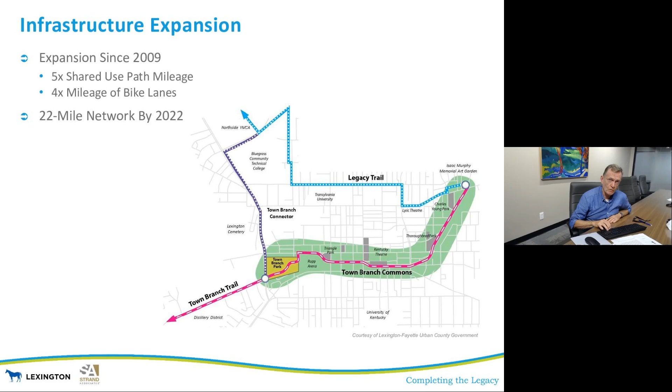What we're showing on the slide is our downtown area and how we are going to be creating a loop, a 22-mile contiguous bike system. The Legacy Trail is on the northern part of the downtown area, and it connects to the Kentucky Horse Park. This 22-mile loop with the Town Branch and Legacy Trail connectors is supposed to be finished by 2022.

Overview of the trail: we actually started the design in 2008. We had a construction completion date of September 2010, so we only had 23 months to get the project started. The impetus for the Legacy Trail was that in 2010, Lexington was going to host the World Equestrian Games.

Well, yeah, but it's not us doing it. Okay, it's the introduction music. I'm sorry to cut in, we're trying to work on it. Something happened when you switched back to the introduction and then back to your slides. We're working on it, trying to figure it out. Just let us know when it's off.

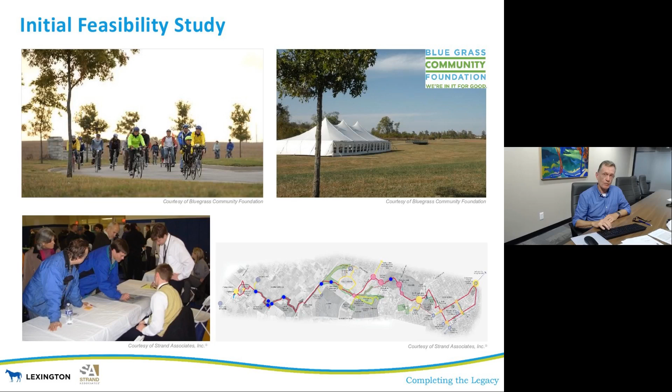The Legacy Trail has a lot of important aspects about it. It's not your typical trail. We actually had to go cross-country. There was no defined alignment, so I guess that was a good thing and a bad thing. We were not restrained on where we wanted to put it, but there was a lot of design that had to be considered.

It was through a rural area, and we wanted to take advantage of all the natural limestone in central Kentucky. We wanted to take advantage of the landscape, but also make it a signature trail. This was going to be our longest trail, and we knew it would be the impetus for getting more projects similar to this. So there was a lot of thought going into the project.

We incorporated a lot of natural features. We had Cane Run Creek that runs north-south from Lexington to Georgetown, so we wanted to take advantage of that. Plus, it was going through the University of Kentucky's Equestrian Farm, which is a research facility, and we wanted to highlight that.

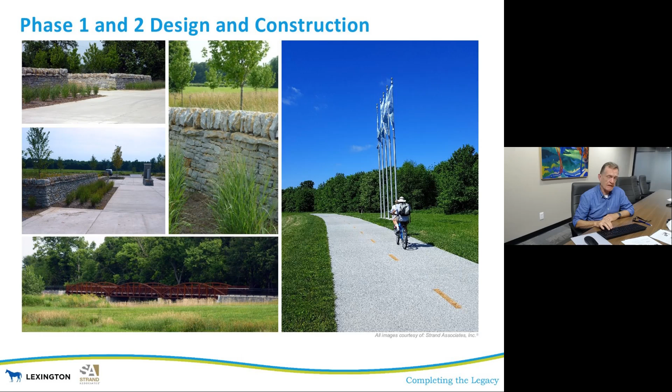So we did that in a number of ways. We included a lot of interpretive signs on the Legacy Trail, and we also included a lot of public art. All of that was funded through various agencies, and our most significant funding was through the stimulus funds, or ARRA funds, back in 2010.

Like I said, it is our longest trail and our most used trail. We average over 60,000 cyclists per year, and we estimate over 100,000 users per year total, because there are a tremendous amount of walkers who use this trail. We're very pleased with the number of people using the trail, and events happen on it pretty much every weekend or at least every other weekend. It's a heavily used project.

I'm going to talk about how we are building the third phase of the project, which is the downtown portion. That is the section of trail that goes from 5th Street at Jefferson to the Isaac Murphy project. This was the downtown portion, which is also the most difficult part of the project because it went through downtown streets with very limited right-of-way, in the urban area.

Unfortunately, we weren't able to acquire any right-of-way because we were working within existing street infrastructure. So we knew what our destination was, we just didn't know how we were going to get there.

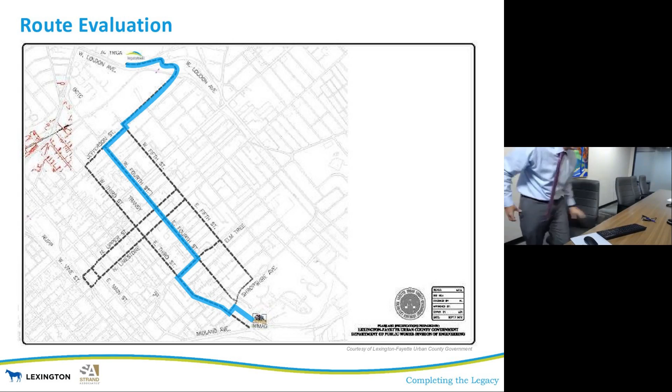Hello, so my name is Chase Wright. I'm project manager with Strand Associates, and we've been working on the project since we were selected in 2014. So it's been a little while, and we're glad to see it completed.

So the first really big decision looked at was the desired facility type. Before we were on board, the public and a stakeholder committee had continued to stay engaged between the time the first segments were complete and the time this project started. So it had tremendous public support, and they wanted it to be special.

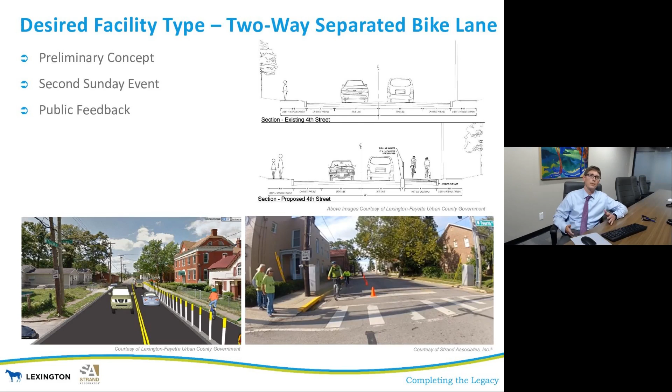Second Sunday is a biking event that happens in October. In 2014, that event actually took the route of the Legacy Trail, the selected route, and with the help of officers and volunteers, coned off a section where people could see what a separated bicycle facility would look like. Obviously it doesn't have the number of conflicts you would normally have, but people could experience it, and the public really liked it.

They really wanted it to be special. So the first step as we were looking at scoping with the city was to do a case study evaluation. There weren't many of these facilities, so we wanted to get a better feel for how they operate, and what some of the concerns and successes were with them.

People for Bikes had an inventory, and there were 210 separated bike lanes, whether 1-way or 2-way, throughout the country at this time. But only 6 were really even comparable to our project. We had Washington D.C., Indianapolis, Seattle, and Louisville, which had one planned at the time.

So what we did is contact engineers and planners from each of these cities to be part of the process. We wanted to talk with them and understand their thoughts, and how many miles they had. You can see from the graphic that it's a very low number of actual facilities they had as part of their overall plan.

The summary findings we had in March of 2015 were that the main goals were to minimize conflicts, along with a couple of project highlights. The Seattle Broadway project has streetcars running down the center of the roadway, and they had an issue with cyclists hitting those rails at acute angles, causing accidents. The purpose of putting the separated bicycle facility on one side allowed cyclists to make their turns at intersections and hit the rails more perpendicularly, so it was actually a safety benefit to utilize the facility.

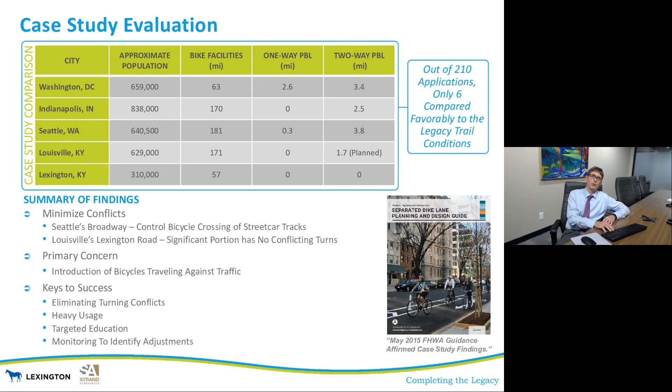So public engagement — the first segments of the project had significant public engagement. Some of the meetings had over 300 attendees, and this portion of the project was no different. We had two large public meetings with over 100 attendees, a number of one-on-one meetings with directly impacted property owners over a 3-day period, and a very involved stakeholder committee.

This public engagement was really important as we went through neighborhoods to understand the real impact of the project. The project takes on-street parking, which is very significant in the downtown area where there are often no driveways. So we needed to really understand their concerns as well as the benefits of the project.

So how do we develop special design features? A lot of people had their hearts set on basically a dedicated facility that was off-road.

And so we looked at using a green bike lane. This will be, next week, when the green gets completely put down. This will be the longest stretch of green bike lane in the state, over a mile of solid green bike lanes.

We looked at special intersection treatments. The main corridor itself is very constrained, but there's public property at some of the intersections where we can do pocket parks, and there's some wide right of way in a couple instances on Elm Tree where we can look at doing bump outs to actually fit in some seating. That was an important consideration.

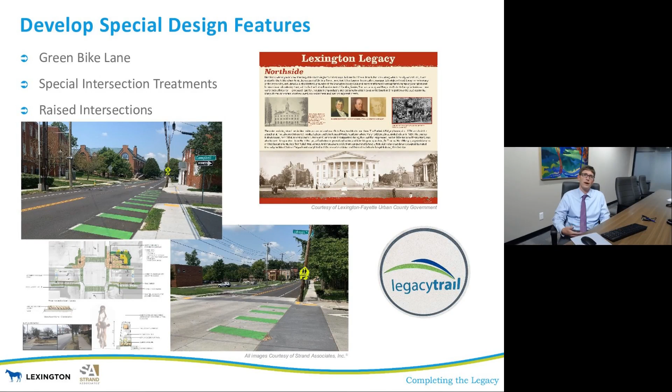Carrying on the theme of using interpretive signs, raised intersections. We utilized the Legacy Trail medallion in the pavement to help brand the corridor as we went through.

So for the green bike lanes, first and foremost, you need approval. They aren't currently in the MUTCD, but there is interim approval. There's only 3 communities in the state that have the ability to put green on right now, and that's Lexington, Louisville, and now the city of Frankfort. If you would like to use green, you have to follow a process and basically request the ability to do it. More than likely it'll be in the next edition of the MUTCD, but it's still something that needs to be done.

Next is cost. You're looking at painting solid 12 feet across the width, so it's a significant investment. With that, you want it to be very durable. With some of these pavement types, friction becomes an issue.

So the first thing we looked at is what kind of guidance is out there. Oklahoma DOT had done a study on different applications, so we first utilized that. The bottom image of the brochure is Norman, Oklahoma, a college town, that has colorized pavement demarcation. This is really the first application of colorized pavement demarcation in the state of Kentucky.

So we wanted to learn more about it. The next picture is a city in Washington State. We contacted the engineer with the city to learn more about the green bike lanes. At the time I spoke with her, she indicated they've been in the ground 8 or 9 years. I asked her what complaints they had. The only complaint she cited was that road cyclists noted there's enough friction and traction there that it actually slows down some cyclists.

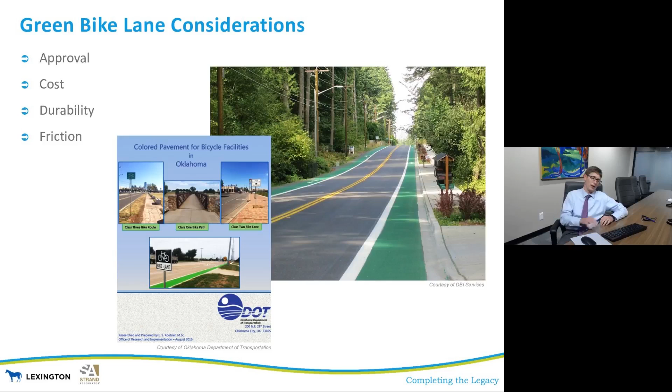So that's really the only complaint they've heard. It actually has a higher coefficient of friction than standard pavement, so it kind of checks that box. After this, the next step was we'd like to see some test applications in Lexington. So we arranged a series of test applications. On the left side is the application being put down.

So what is colorized pavement demarcation actually? It's basically very similar to high friction surfacing that the cabinet uses now along curves, just with a different aggregate. The epoxy goes down, and then they take recycled colored glass beads, they're green, and basically embed them in the epoxy. The nice thing is when the top wears off, the bottom is embedded and protected, so the color still shows through. That's what the engineer from Washington State indicated, that after 9 years it still had its color.

So the graphic is just to give you a little perspective. This is on Limestone Street. If you aren't familiar with Lexington, it's the main road that connects, a major arterial connecting the University of Kentucky campus with downtown Lexington, right at Vine Street. There's a pretty significant downgrade with a heavy right turn volume, and with that heavy right turn volume, it's buses, because the transit center is just to the right. The city wanted to implement a bike box in this location to help reduce the right hook potential for cyclists.

The picture, this was done just over 3 years ago, three years and a month, and the picture on the right was taken this week. Now it is very discolored. We were hoping we would have a pressure wash, because basically if you pressure wash, it'll remove the grit and the color will start shining back through.

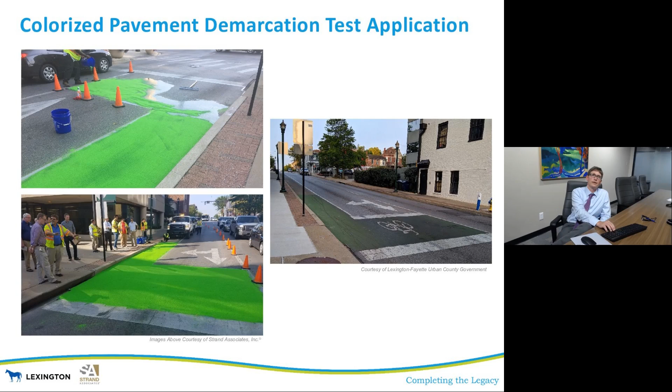Raised intersection guidance - again, there wasn't a lot of national guidance at the time, so we looked at what other DOTs are doing. Delaware and South Carolina had guidance that was very similar on raised crossings, so we took that guidance and met. Keith and I met with emergency services. They were initially a little apprehensive about the thought of a raised intersection for the project, but after reviewing the information with them and having those face-to-face meetings, they felt comfortable moving forward.

The details on the right are project details. The top shows we utilized speed transition markings going up to the raised intersection. The raised intersections are a different paving material - we used concrete instead of the asphalt road, and then used colored pavement for the crosswalk markings.

Now when you use colored pavement, this is a time to go back to the MUTCD. The MUTCD, or FHWA, issues interpretations, and there's a lot of discussion on art in crosswalks, colored pavement, that they have guidance on. If you're going to use some type of colored pavement, I recommend looking at that guidance. It gives you an idea of using colors that mimic brick patterns or earth tones - more standard approaches. There's a lot of guidance in there, but you still need the standardized markings that would mark a crosswalk, and ours have it.

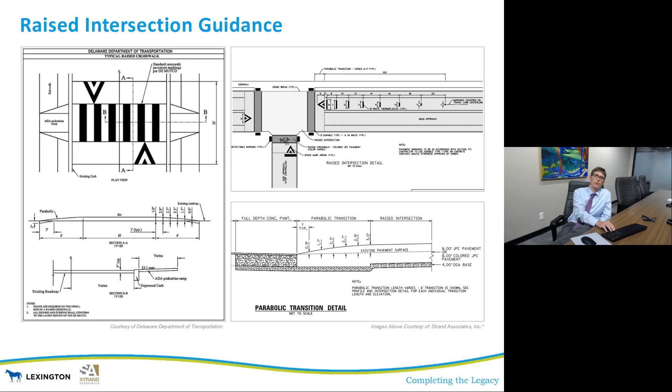The raised intersections have a parabolic transition to them, again to help slow down vehicles approaching the raised intersections. So we utilized two raised intersections.

The project corridor has two schools on it. We have Transylvania University, and the top pictures show the existing Transylvania University at Bourbon Avenue and 4th Street, as well as the final construction. Transy recently continued to build dorms on one side and built parking facilities down Bourbon Avenue, so a number of students were going to be utilizing this facility every day. We wanted to improve the crossing for pedestrian safety, and also provide some traffic calming along the corridor, as well as general aesthetic improvement.

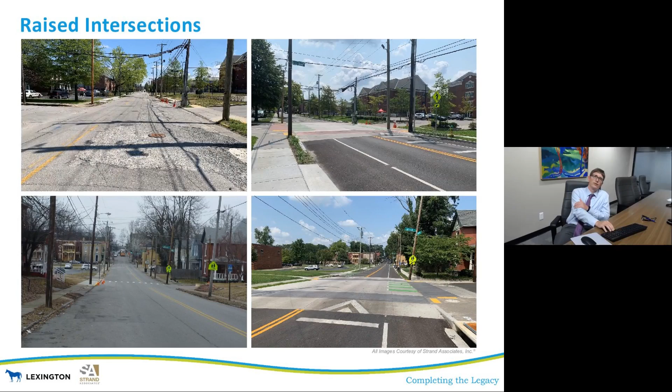One concern was that the public in this neighborhood felt they hadn't gotten the same level of attention and investment as other areas of town. During public engagement, residents expressed they wanted that same level of investment. The first phases cost about $1 million a mile, and this section is looking at about double that investment, because it was important to the community that this corridor felt special.

Some of the enhanced intersections - top left, this is on Elm Tree and 4th, where we were able to reduce the crossing distance and use that space for seat walls and enhanced landscaping along the corridor.

Bottom left is an area where we acquired a little right-of-way right at the intersection from Transylvania University. We have a seat wall, a gateway monument, and the only mile marker through this segment, along with bike racks matching the configuration in the rural segment, and flagpoles.

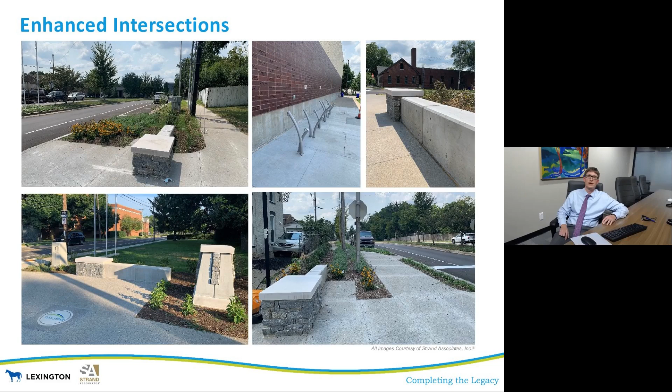Another thing we heard early in the planning is that the community likes to gather in this portion of the neighborhood. Community is very important, so providing spaces for people to have conversations would be very welcome, and we wanted to do something the community would really benefit from.

As I mentioned, the biggest hurdle from a concern standpoint was how do you take existing on-street parking and convert it into bike lanes. We knew this was going to be a challenge and that there would be pushback on the project.

One of the early steps was working with the city to identify a parking inventory, conducted multiple times on weekdays - early morning before 6 o'clock, midday, and evening - and also on weekends, so we could see how parking demand changed over time on a block-by-block basis.

Keith and I took this information and sat down in one-on-one meetings over a 3-day period. These meetings were helpful, letting people express concerns directly rather than in a group setting, which allowed people uncomfortable speaking in a large group to voice concerns, and also kept things controlled if people got upset, so we could listen and think about design solutions to mitigate those concerns.

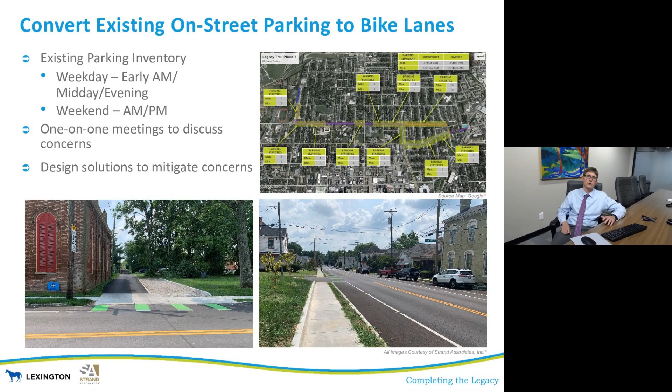The city made additional financial investment into the project to accommodate this, but it was a big success for those residents.

So, limestone curb - this is a National Register Historic District. In fact, one of the deeds we had to trace back was actually signed by Henry Clay. So to give you a perspective, this area is rich in history, and they have limestone curbs along the corridor, and that's a contributing element to the National Register Historic District, as well as the grass strip, the utility strip, which is also a contributing element.

So Keith and I, along with the state's environmental staff and the City of Lexington's Historic Preservation Officer, worked really hard to take a look at the limestone curbs and identify curb to leave in place, and curb to relocate. And when you relocate it, the problem is that over the years, the limestone curb has been chipped, hit by snow plows or various other cars, so it's been damaged.

So one of the techniques we looked at - after we figured out where we were going to put it, the next step was how do you build it? I was actually on vacation in Charleston, and I saw they had really beautiful stone curbs. So I called the director, one of the folks in Public Works, and they let me know that their key to success was not having snow plows. We obviously won't have that benefit in our location, but it's important to gather advice from other people who have dealt with this.

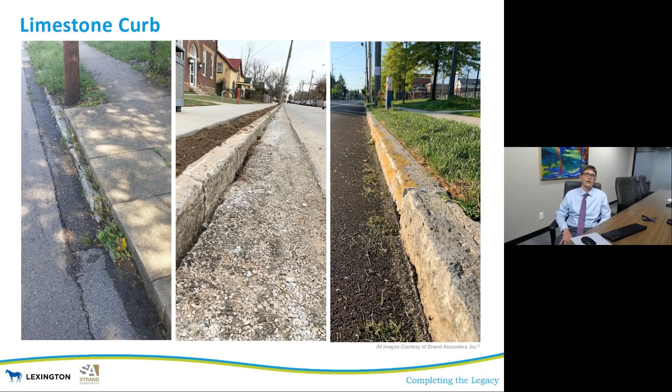This was a very significant cost on the project - over $200 a linear foot. But at the same time, it was very important and required as part of the environmental commitment with the federal funds used on the job.

So as we think about limestone, the Legacy Trail is one of the elements of the project. The picture on the left is the Gateway Monument at the Kentucky Horse Park, and the picture on the right is a gateway monument on the project corridor. Limestone is used differently in different parts, but it's obviously important for all of central Kentucky. The way limestone is used downtown is for curbs and building foundations - it's not used as much on rock walls.

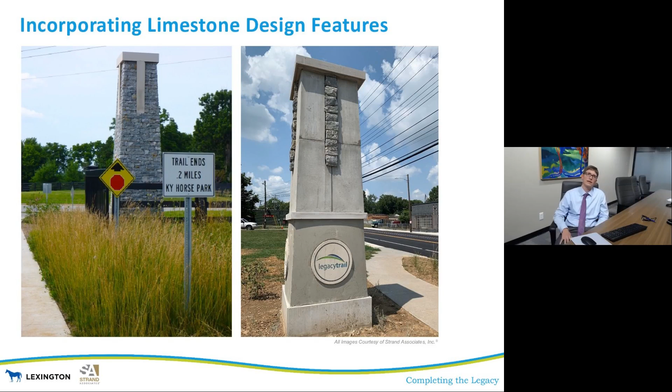So one of the things in working with the historic officer was to use more modern materials and less limestone. That was a design modification on the large gateway monuments, and also the scale of those monuments shrunk a little bit to help better fit within the corridor. This monument sits as the gateway into the Legacy Trail on the 3rd Street corridor.

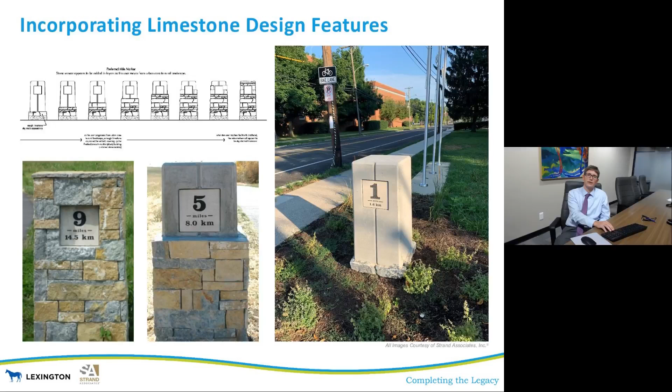This is similar to the approach we were already taking. The top left is from the feasibility study, showing how the mile markers would have less and less stone and more concrete as you got into town. Now we only have one mile marker within our segment, and you can see it's mainly concrete, versus the prior two monuments shown on the left - they're also a little smaller scale. That was another thing - being in tune with the scale of the environment, shrinking them just slightly.

So this picture on the left is a monument and seat wall that's pretty much all stone, out towards the Kentucky Horse Park. The picture on the right is a transition showing the seat wall with a significant portion of it being concrete - the gateway monument, the mile markers. So again, just showing the difference in materials, and there's one of the embedded Legacy Trail medallions along the corridor. The intersections also had enhanced concrete paving done that really helped enhance them as well.

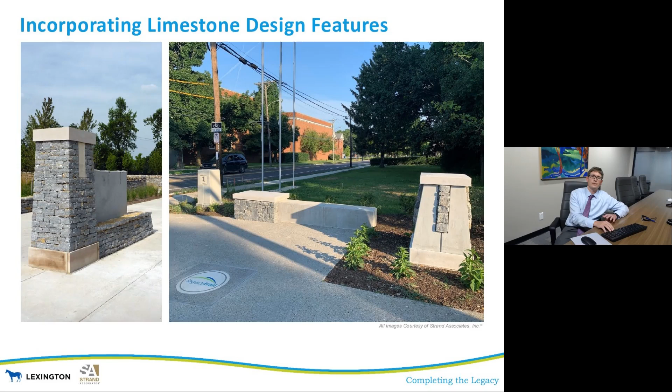Intersection improvements - here's a before and after. This is the historic Lyric Theater at 3rd and Elm Tree. They did an improvement project there several years ago that included paving right in front of their front door. In this pre-COVID world, they were very concerned about maintaining access into the front doors for big events, so we took that into consideration as part of the design philosophy.

Also, if you were walking from downtown, there was an existing 10% cross slope, so that whole area wasn't ADA accessible. What we did is bump the road in, take a paving line, saw cut out, and provide the accessible route on the new construction while minimizing impact to this historic theater, which also helped their operations during construction.

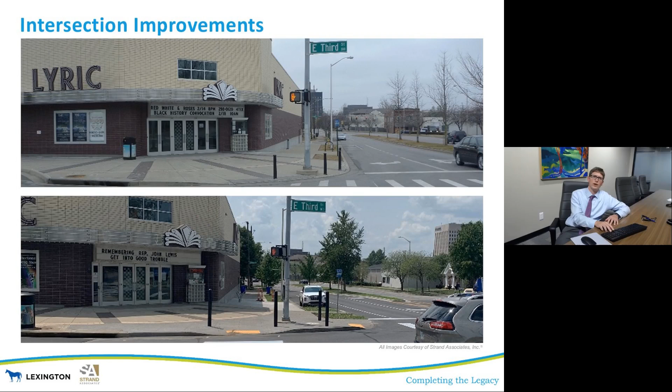Another improvement at the intersection: 3rd and 4th Streets used to be one-way in the 90s before being converted to two-way traffic. When they did that, northbound had an existing wide median and a shared through-left, with a pretty significant offset from southbound traffic. There was an accident history there, and traffic engineering really wanted to remedy that.

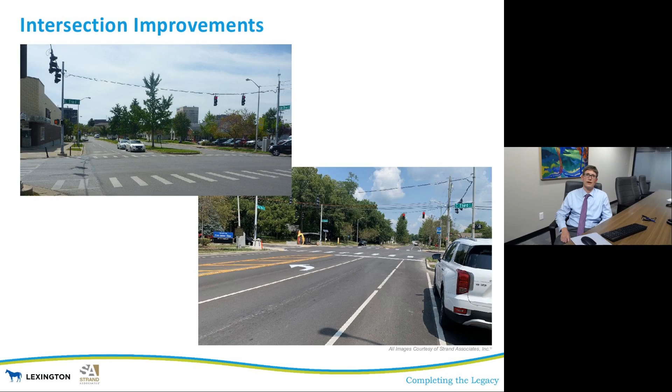As part of the modifications, we removed the median and provided a dedicated left turn lane, then removed the dedicated right turn lane to do a bump out. This allowed us to reduce the offset between the two directions and provide dedicated left turn facilities, while also increasing pedestrian space along the edges.

Keith, I'll turn it back over for the construction update.

Thanks, Chase. We started this project in December 2019, and as Chase said, we're getting ready to install the green bike lane starting Monday, which will basically wrap it up. The project was a $4 million project, and we're about $500,000 under budget, so we were able to save a lot of money. Pace Contracting is our contractor, and they were able to complete it much earlier than what we had proposed.

I think that was mainly because of COVID - schools were closed, traffic was very mild, so they were able to close the streets completely, which allowed them to work very fast. We're very pleased with how the project came out, and we're already getting a lot of positive feedback. People are very excited. This is just another link in our 22-mile network that we hope to complete by 2022.